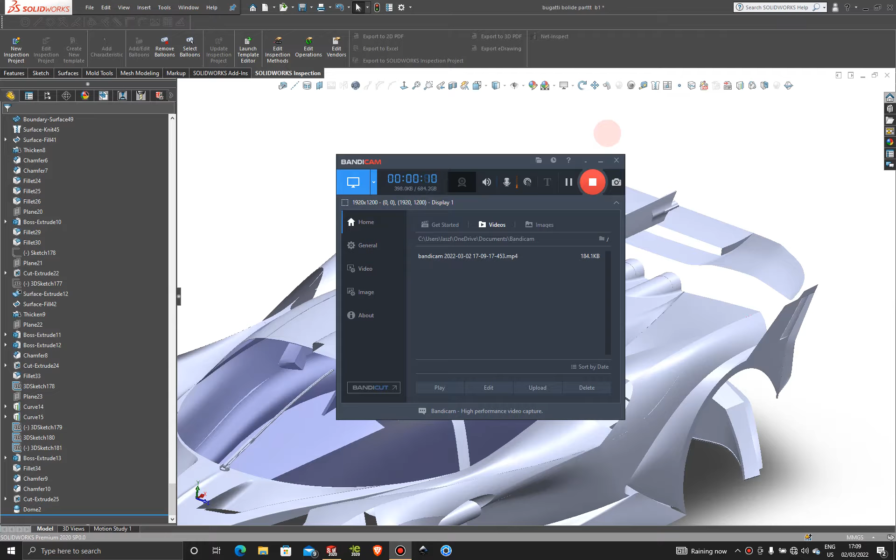So in this tutorial, we're going to fix up these surfaces here. We're going to attach this body to the surface, to the body of the car actually. We might not make it into a solid body for now, but we're just going to attach it. In the last tutorial we left off right over here, so let's pick it up from here and continue.

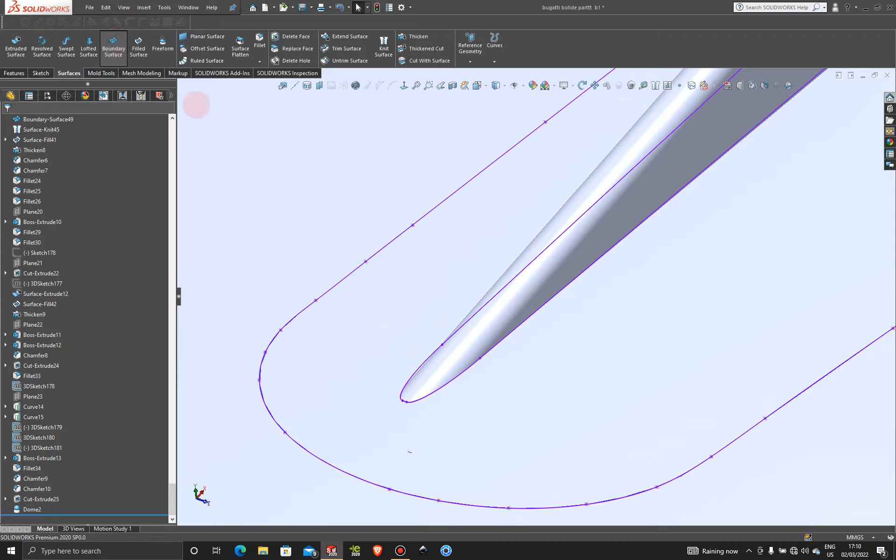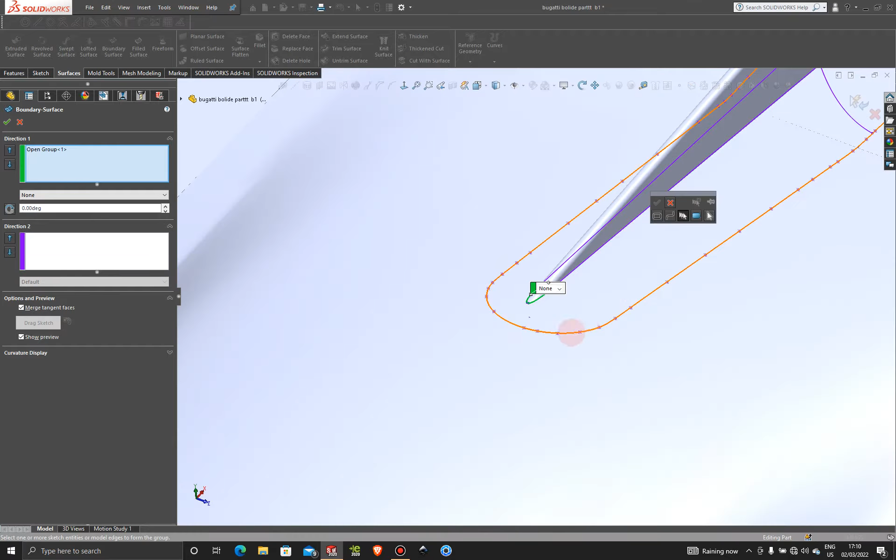So let's first create this first front piece here. Let's go to surfaces and boundary surface, and with the selection manager, let's select this sketch here, the small one in the front, and this here, and press OK. Then with the selection manager, we're gonna select this one here, press OK.

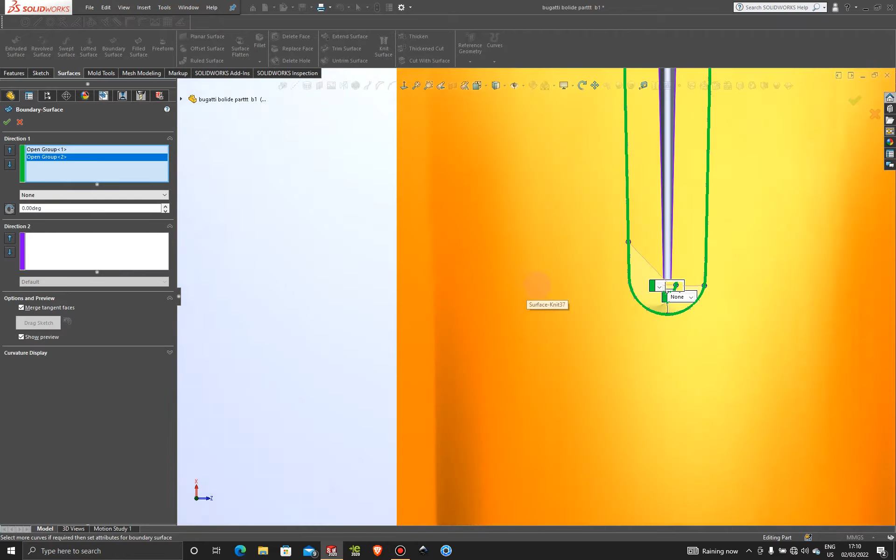Okay, and we're just gonna pull back these lines to about here, and this one as well. And we're gonna do something different here, so we can eliminate SolidWorks limitations.

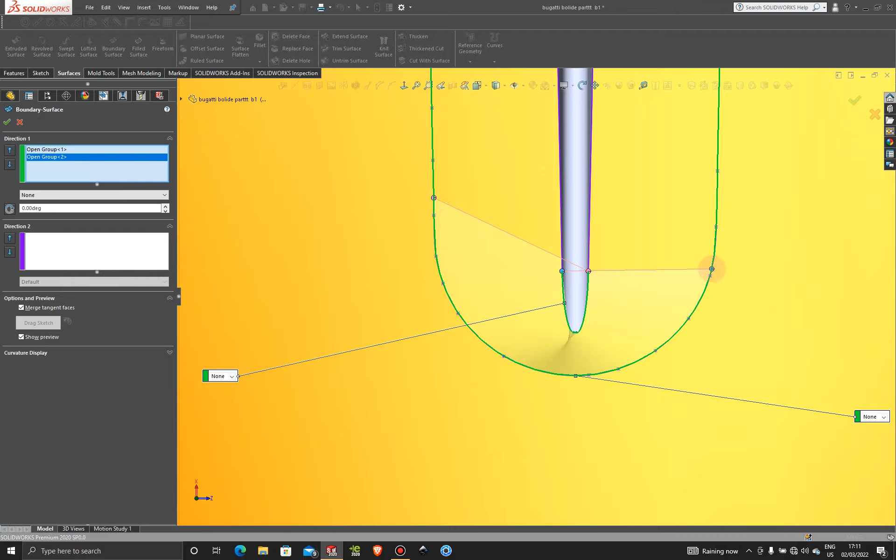So let's jump in here quickly and let's flip these connectors actually. So flip connectors, there you go. That's what we want, and we want to make these lines straight.

So the way we're gonna do that is we're gonna drag them around until it's a straight line. As long as there's a break in the line, it's not straight, obviously. So we're just gonna pull it until it's straight. As you can see, you've got 1, 2, and 3 breaks in it, so it's not straight yet. There's 1 break now, so let's make that straight this way.

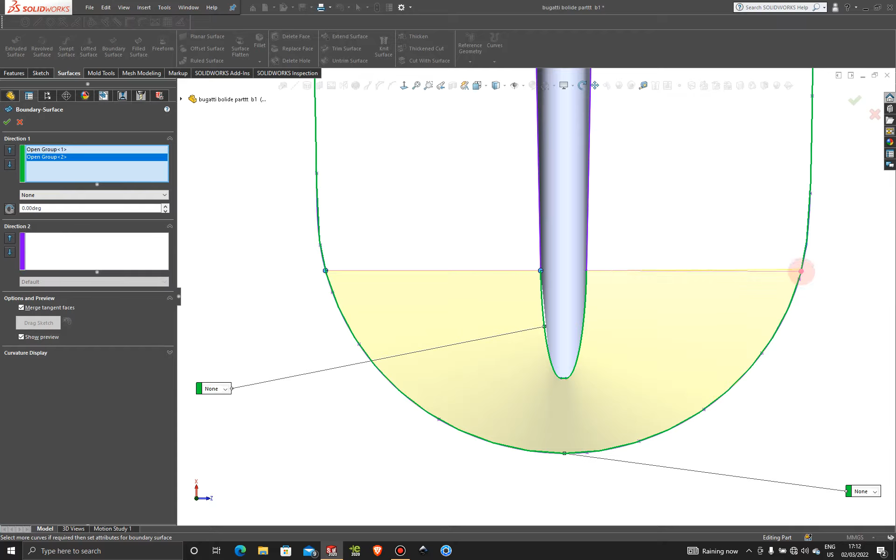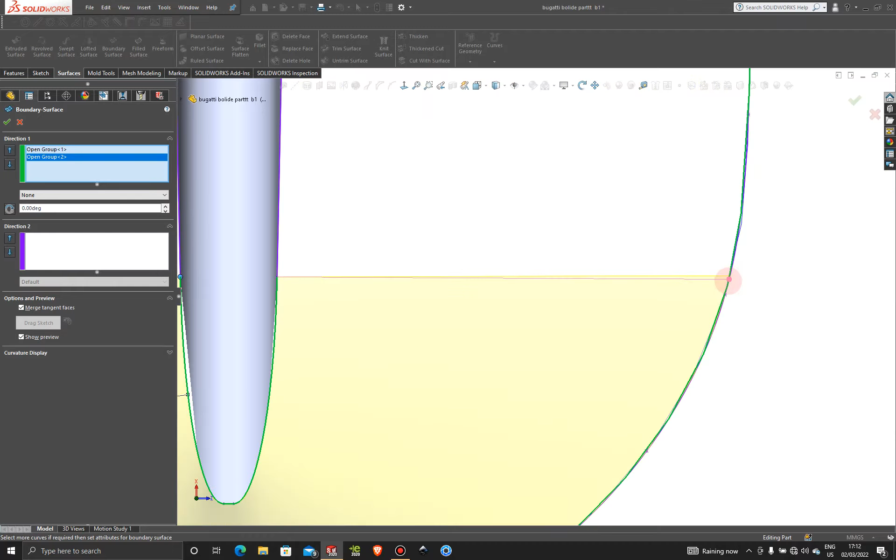If you zoom in a little bit more, that's the 1 break we want to get rid of. Just the 1 break. There's still 1 break in that line, and I don't think that will be an issue. All right, so we're gonna leave that as is and press OK.

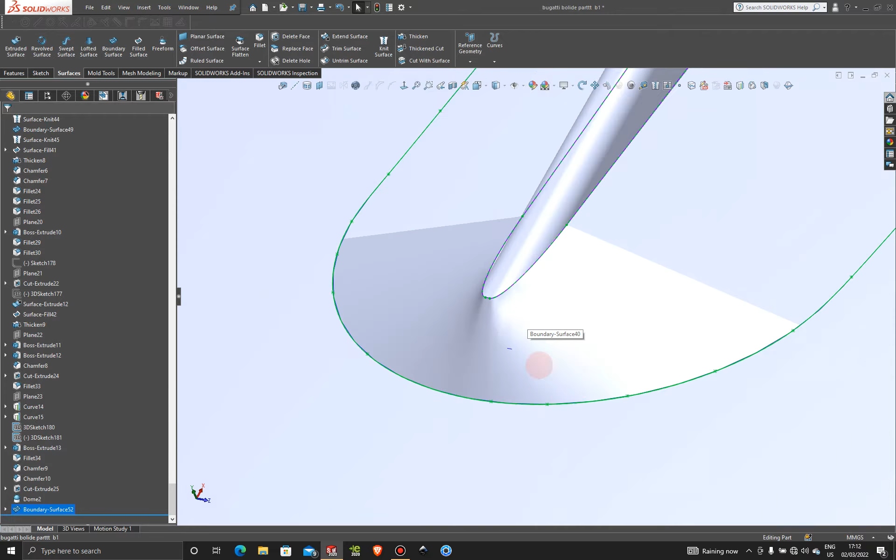We're just gonna have a look at the surface. Okay, so the surface looks good. However, I want to come back in here and edit this feature, and I want to see if I can add some tangency from here.

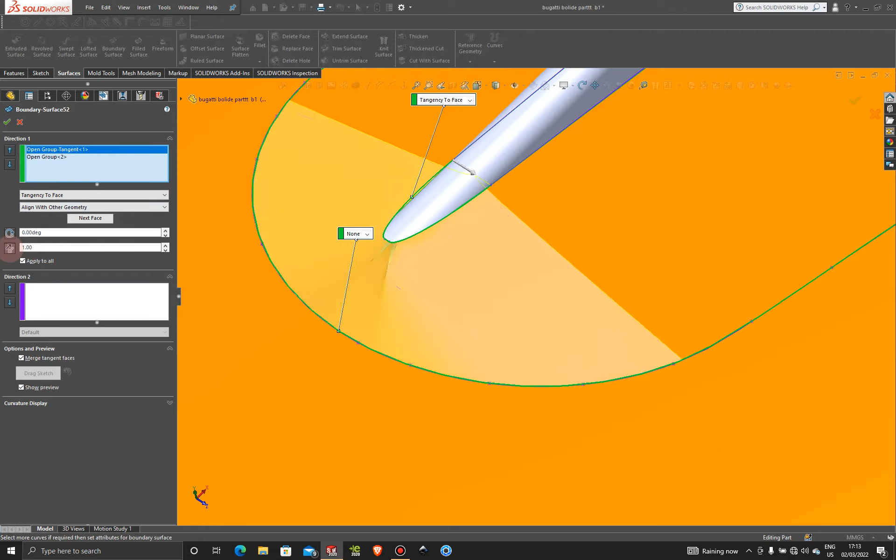Oh, I doubt it. No, direction to vector, tangency to face, and let's reverse that. Obviously, if you do that, it will create some ripple effect. So let's get rid of that, none, and let's try to add the tangency here, which we cannot. Or we could probably add a direction to vector, but let's just leave it like that.

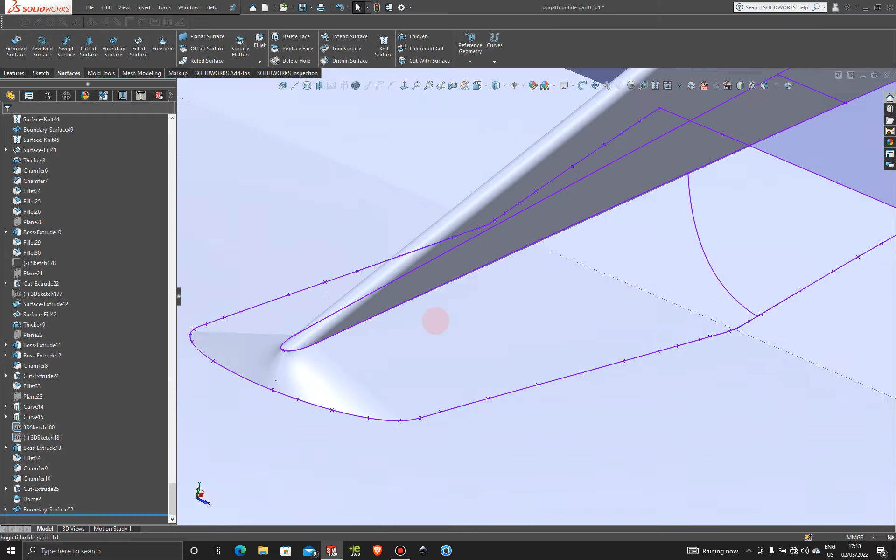Okay, and the next surface is going to be from here to here. So let's go to boundary surface and then selection manager. Let's select this line here, press OK, and then selection manager, of course, this line, and press OK.

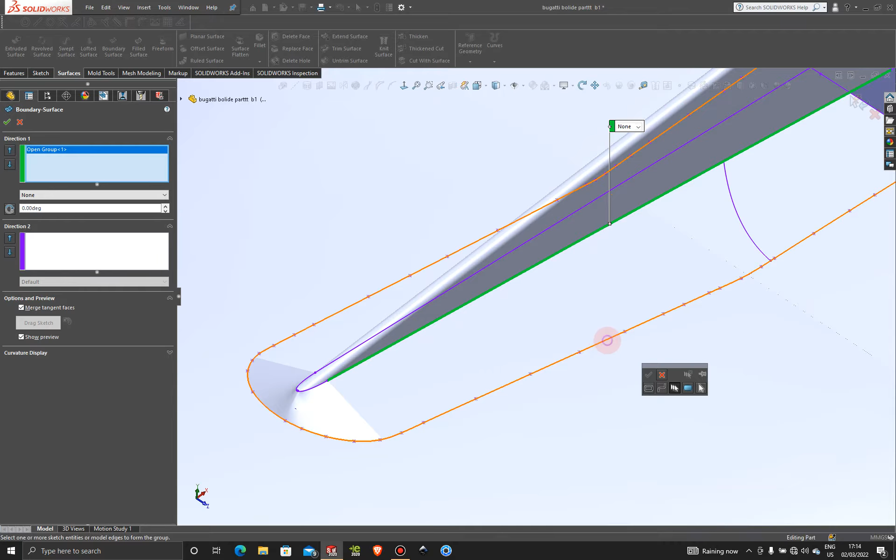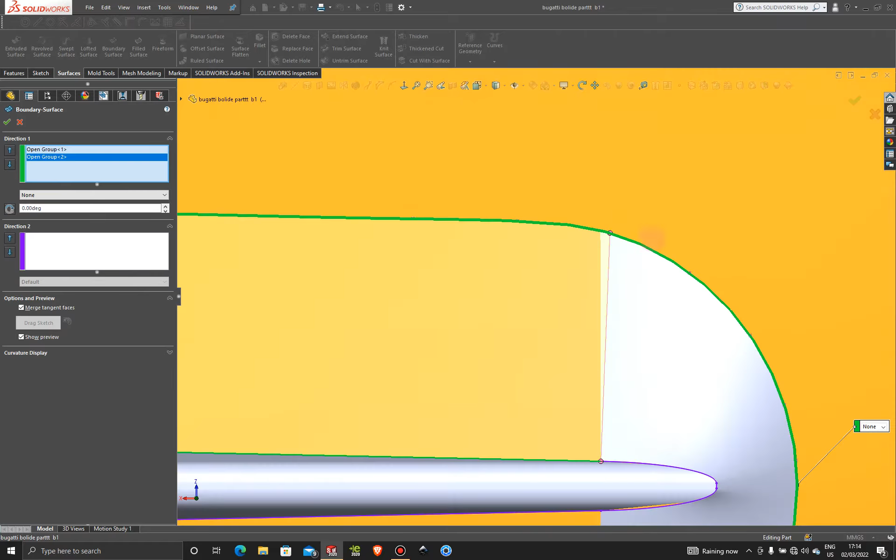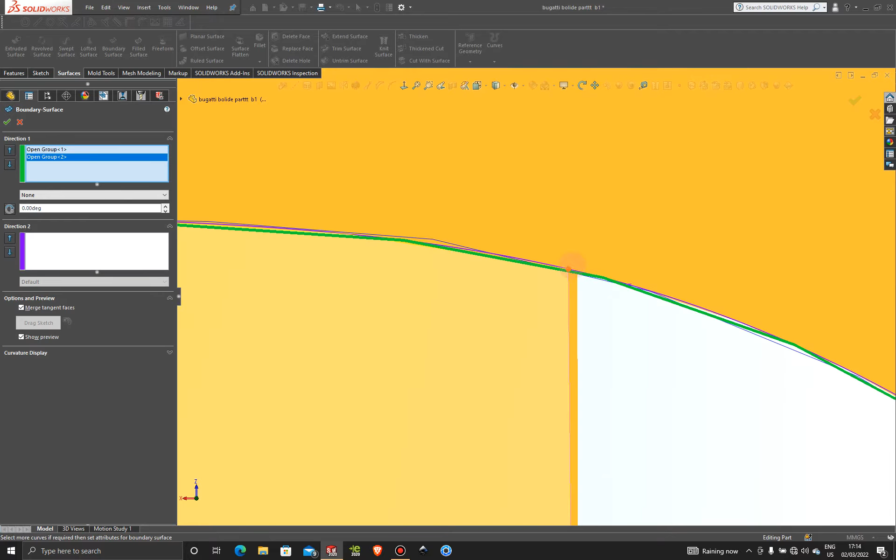And we're just gonna pull that point all the way around, back around, like that, and we want to touch that edge until we see the black dot. So let's get to the top of that surface here. Okay, so we're gonna go with something like that.

And for direction 2, let's select this line. And then let's select this edge. Hopefully we'll be able to select it. We actually are, which is good. And press OK.

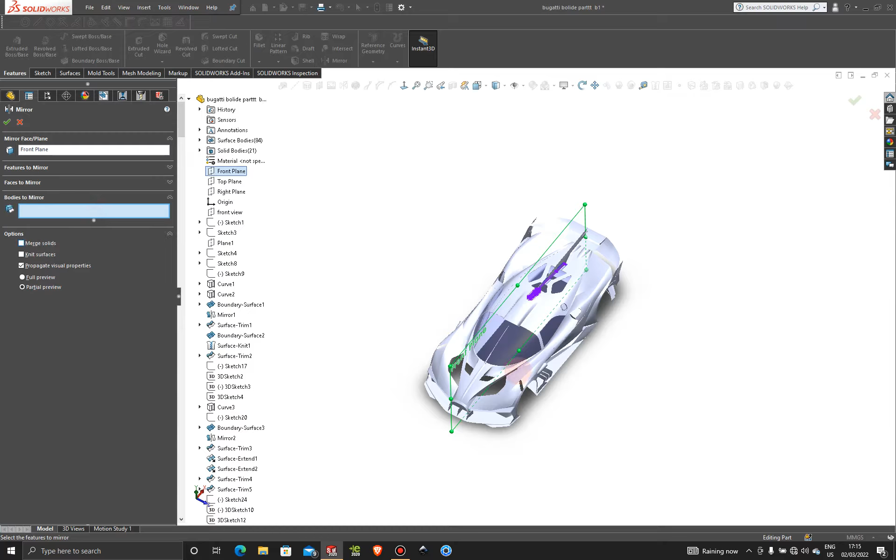Okay, so that created that beautiful surface right there. And then what we're gonna do is we're gonna mirror this surface over to the other side. So let's go to Features, Mirror, and then let's select the front plane as the mirror plane, and of course bodies to mirror as always. So let's zoom in here and let's select this surface here. Press OK.

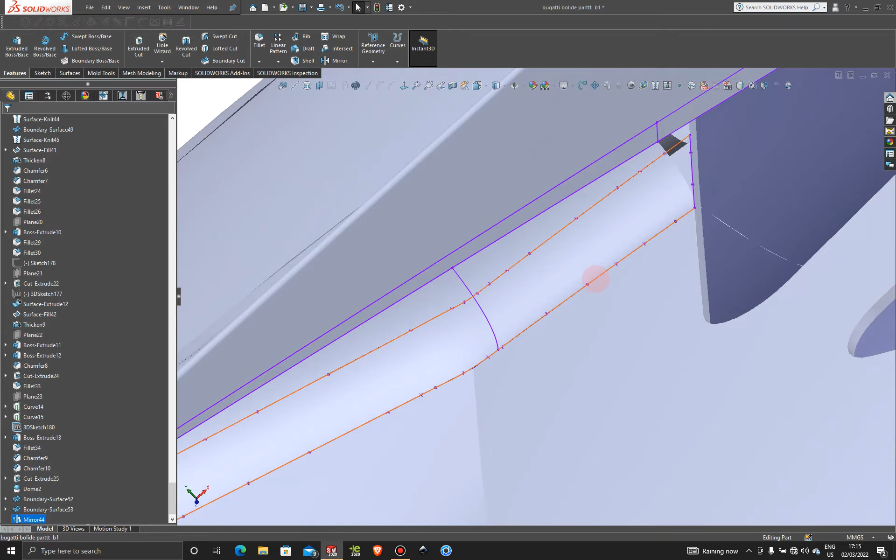All right. So this surface is not done, but I'm pretty happy with that. So now let's hide, let's not hide anything, we can hide the lower sketch here. So let's hide the lower sketch. Okay, and we're gonna leave that, and let's hide this directional curvature as well.

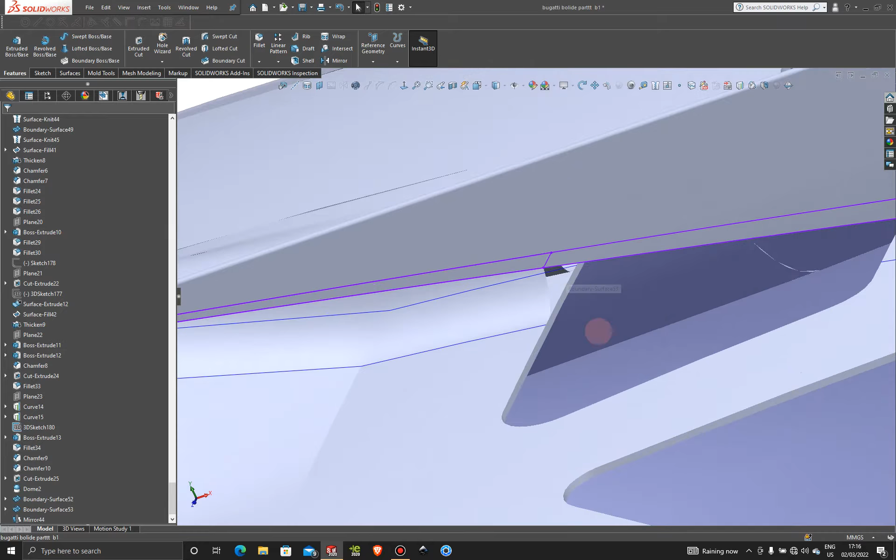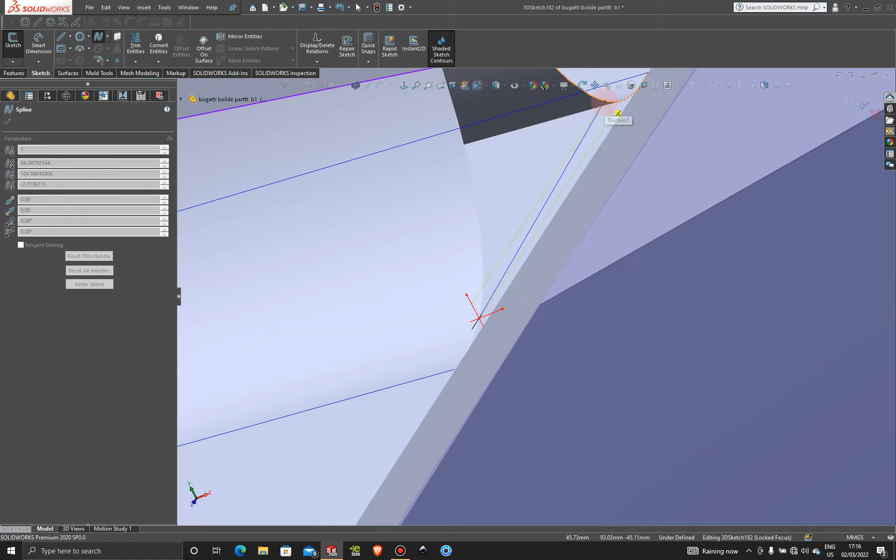And then we just want to close this surface up over here. So let's go to Sketch, 3D Sketch, and the first thing I want to do is grab a 3D sketch and just drop it onto this line, this edge here. And I want to grab that point and pull that point until it stops right on that end, and pull that until it stops on that end of that surface.

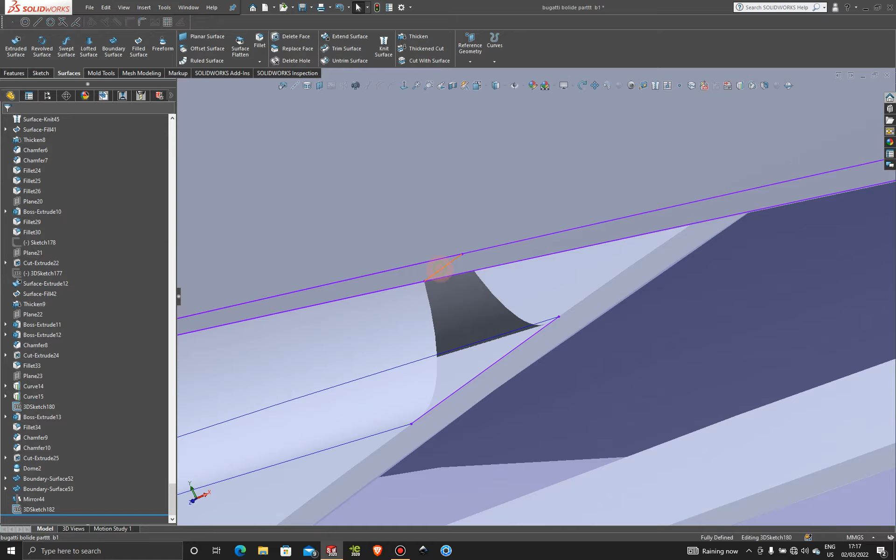Press OK. And now we're going to jump to surface here and let's create a filled surface from these sketches. So filled surface, automatically selected that one, and let's just select these edges here. So we're gonna have to hide this one here.

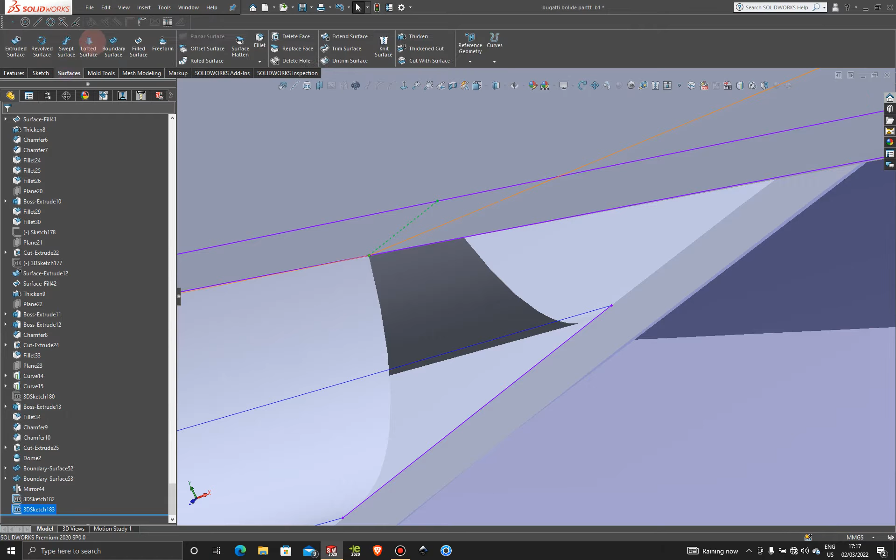Okay, and then we're gonna create a brand new 3D sketch, a 3D spline from this point to this point here. Okay, and then hopefully now it will give us the nice fill surface we're looking for. So let's go to surfaces, fill surface, and let's select these edges here. That's it, that's the surface we're looking for, that's a nice surface. So let's go to knit surface and knit these two together.

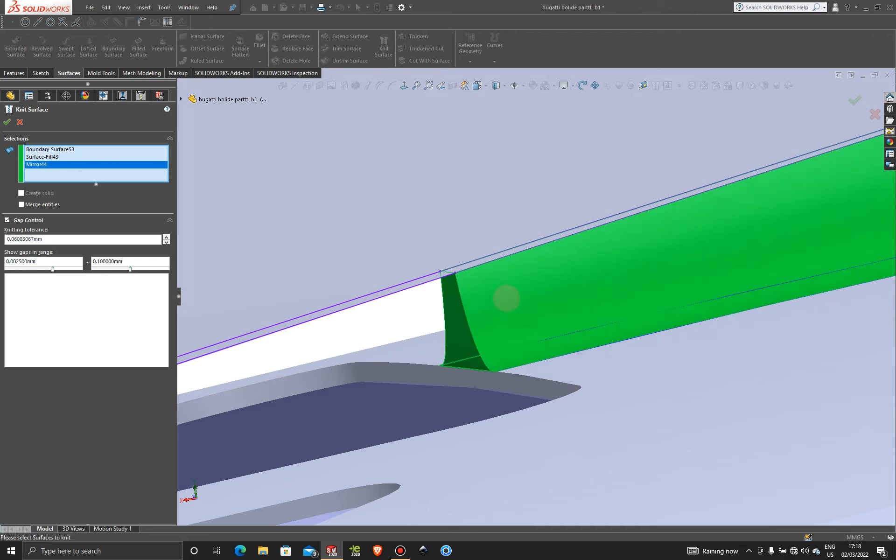All right, so if you want to make a solid, obviously we're gonna have to create another surface on the lower section, which we will probably do. But for now we just leave it like that. I think it's pretty good.

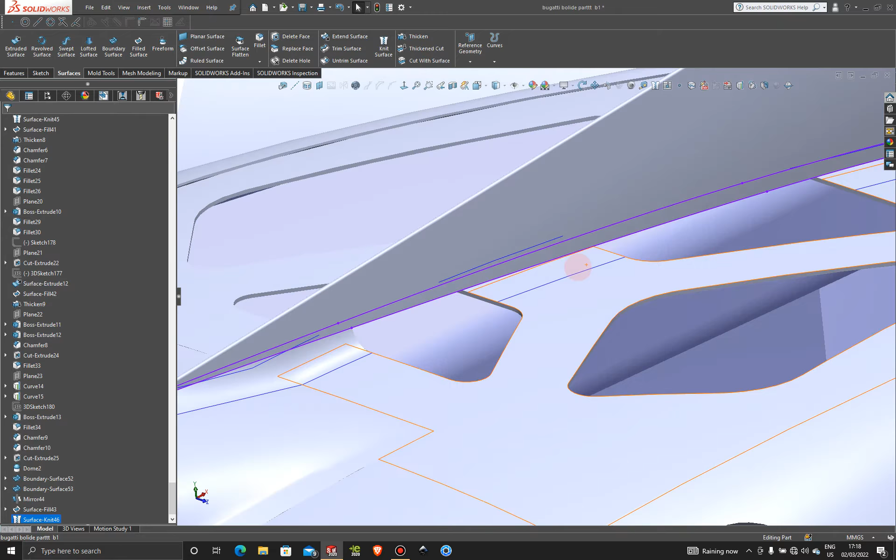So the next thing we want to do is create the next surface coming from here to here. For that, we're gonna have to create a direction vector. So we're gonna go grab a 3D sketch, grab a center line, and drop that center line right over here on that edge. Then exit this one and click somewhere in empty space.

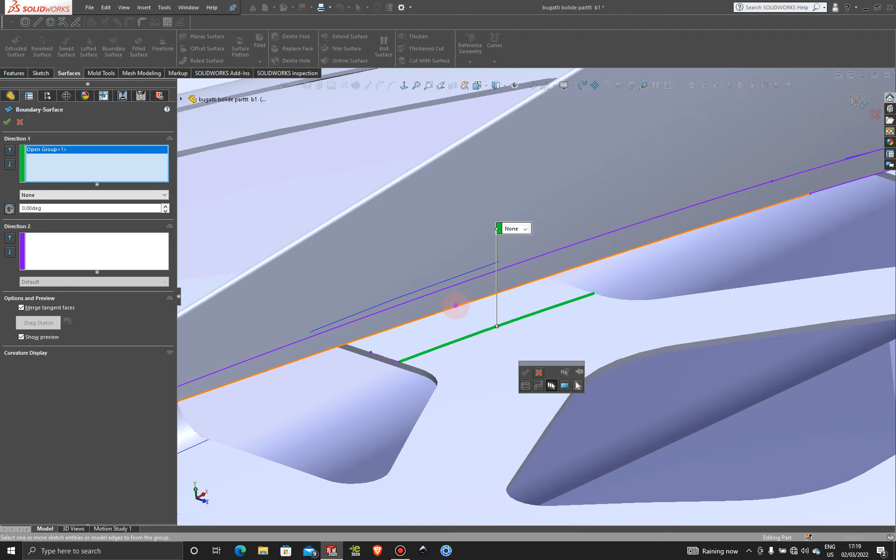Let's grab that surface, this boundary surface, and with the selection manager we're gonna select this line here. Press OK. And again, selection manager, this sketch here, and press OK.

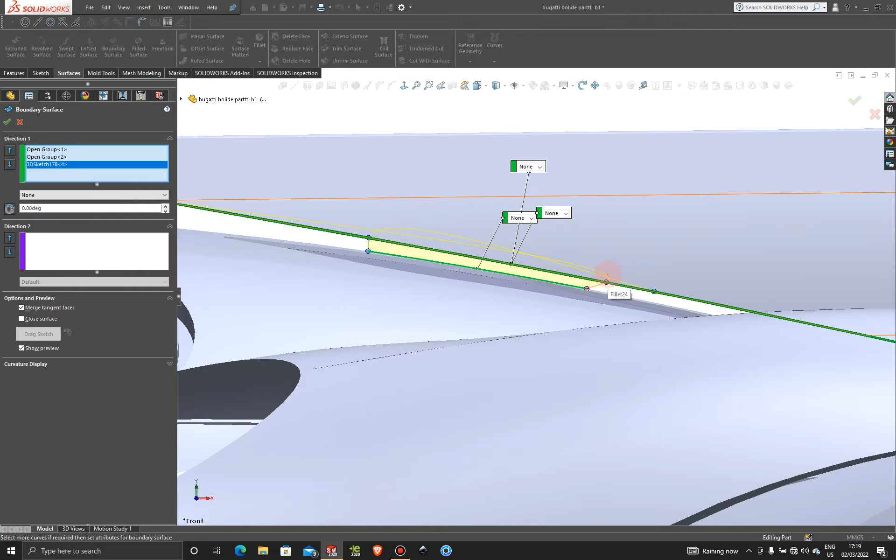We're just gonna jump to the side view here for a second, and set our parameters. I want to make that straight in that direction, and pull this up to about here like that. Well, let's do a control Z because we messed something up over here. Control Z, we'll do that. Clear selection, let's do that one more time.

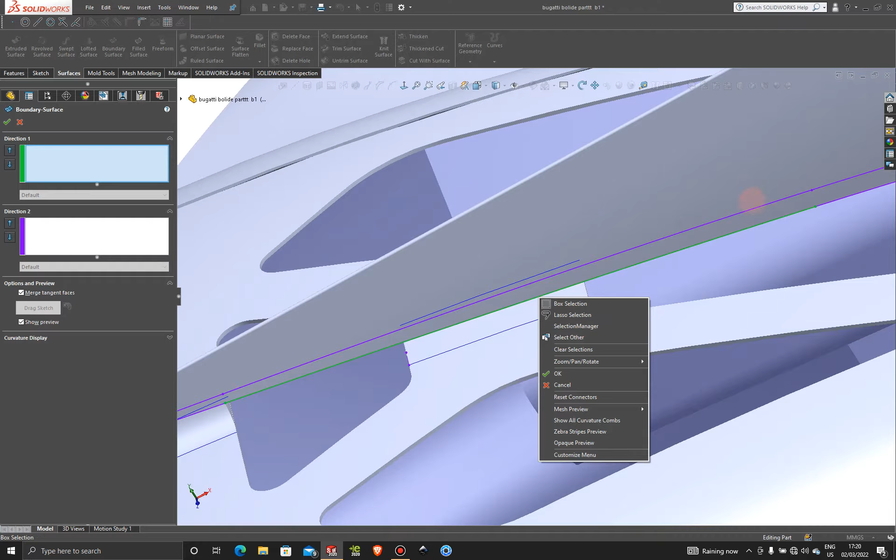To be honest with you, we can hide these lines here. So let's hide these lines. All we need is this directional vector over here.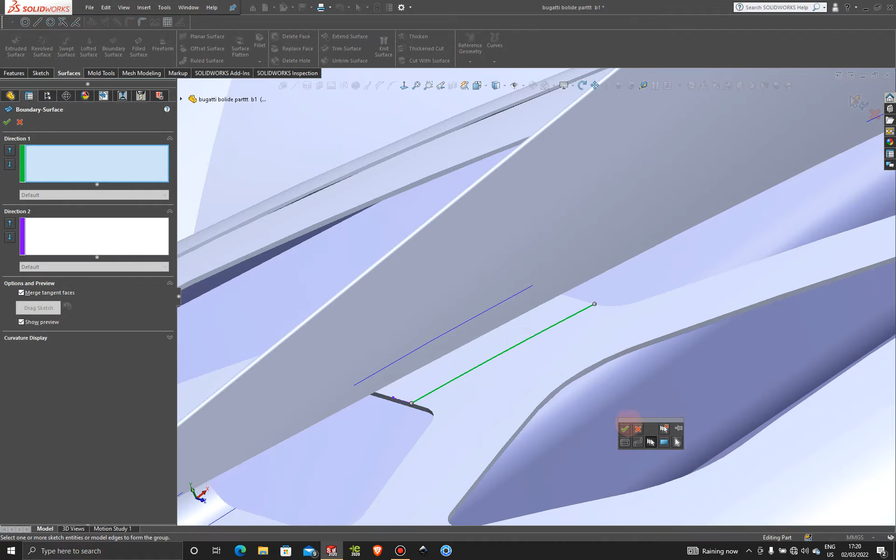So let's go and grab the boundary surface again, selection manager, and select this sketch here, not sketch but the projected curve. And again, selection manager, then select this edge here. Press OK.

And now let's grab that point and pull it in like that. We're just gonna look at it from the side. How does it look? Make it somewhat straight. Okay, that's good.

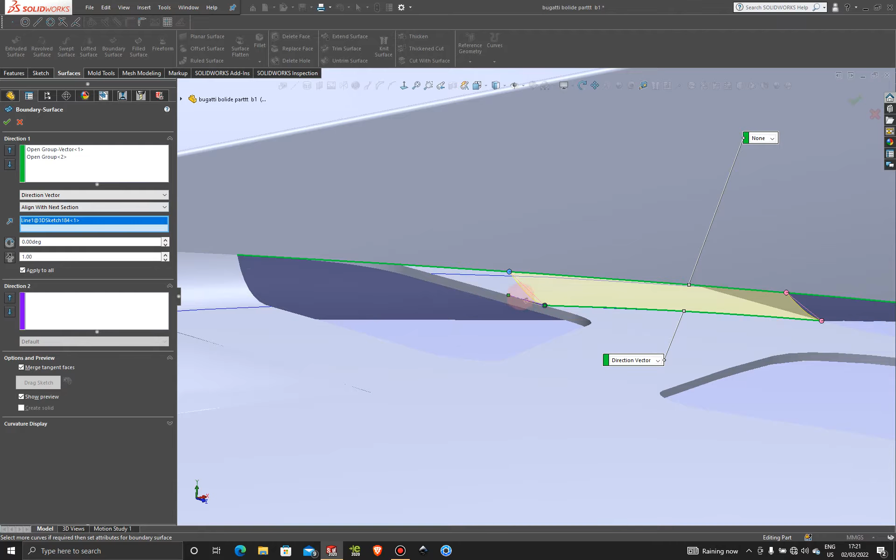And now we're gonna use our direction vector line here. So let's put this down here, and select direction vector, and our vector line is going to be this one here. And we're just gonna pull that a little bit in like that. Okay, I'm quite happy with that.

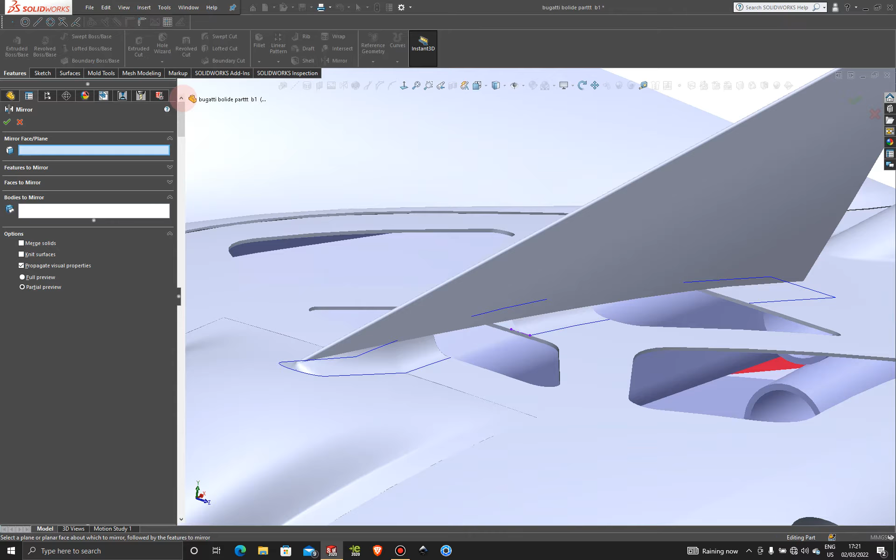And then again, we're just gonna go to features and then mirror, and we're going to mirror this first surface over to the other side. So let's select the front plane as a mirror plane, and then for the body is this small surface over here. Okay, so that created that surface there.

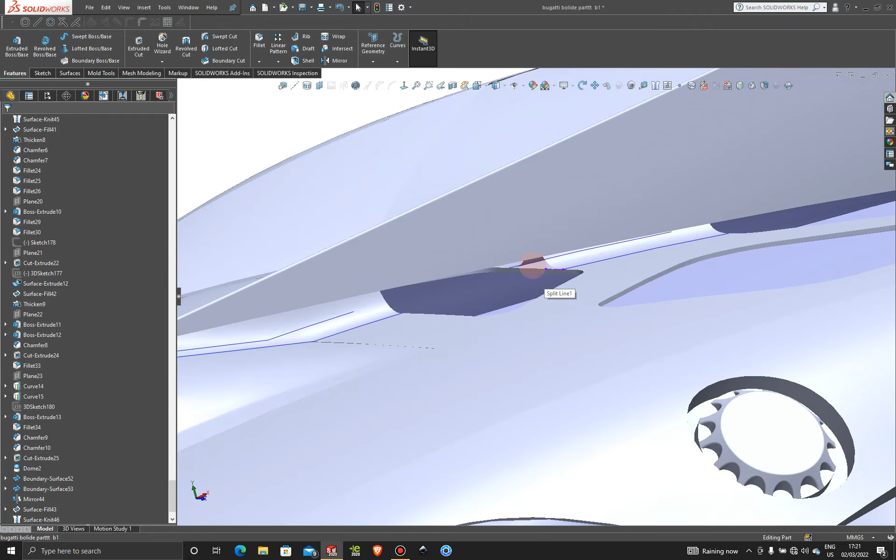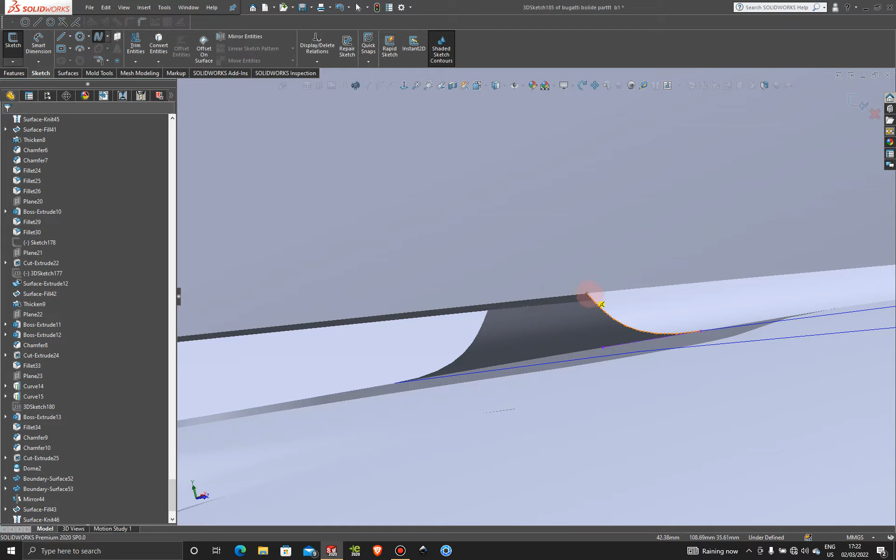And of course, all we have to do now is connect these two points here, so we can create a fill surface here. So let's go to sketch, then 3D sketch, and let's grab the spline, and we want to go from this very end point here to this point here.

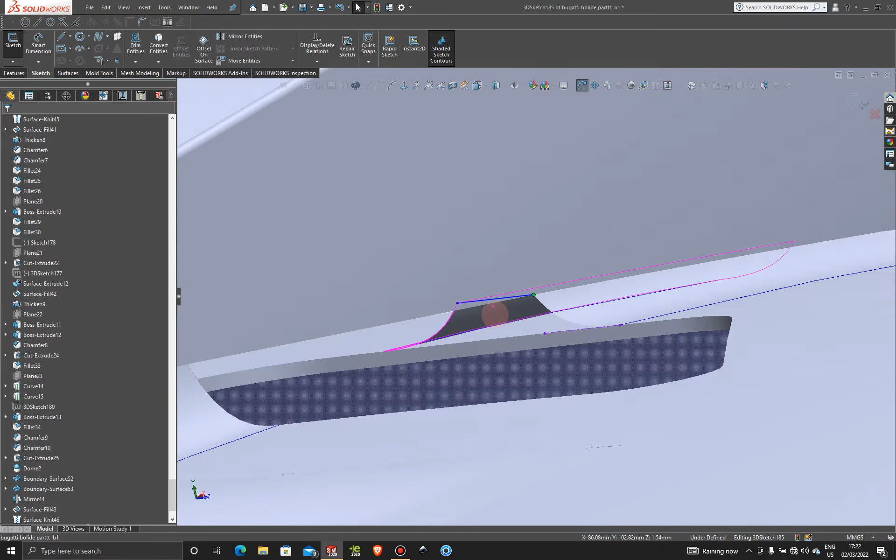Let's go control Z because we didn't snap to that very well. So let's grab that spline again. Let's just click on these edges here, and we're just gonna pull these points up until it stops. That's it. Exit this one.

And we're gonna do the same thing on the bottom. So 3D sketch. I'm gonna see you back once I've created these on the lower section and on the other side as well. So see you back when I've done that.

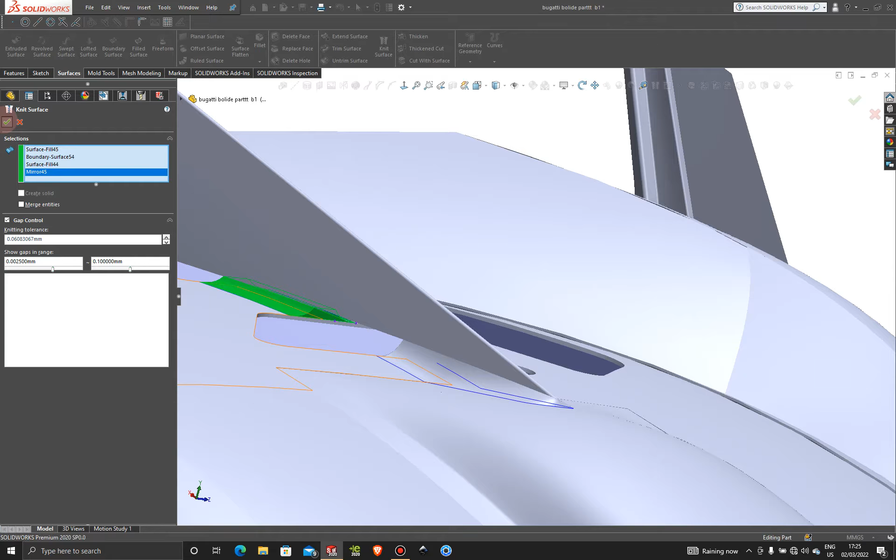Alright, so I've done the same thing on both sides here, and now we can knit them together. So let's select these faces here. And again, to turn it into a solid body, we need to create a surface underneath it and then create a solid. Okay, so that's done as well. I want to save the project here.

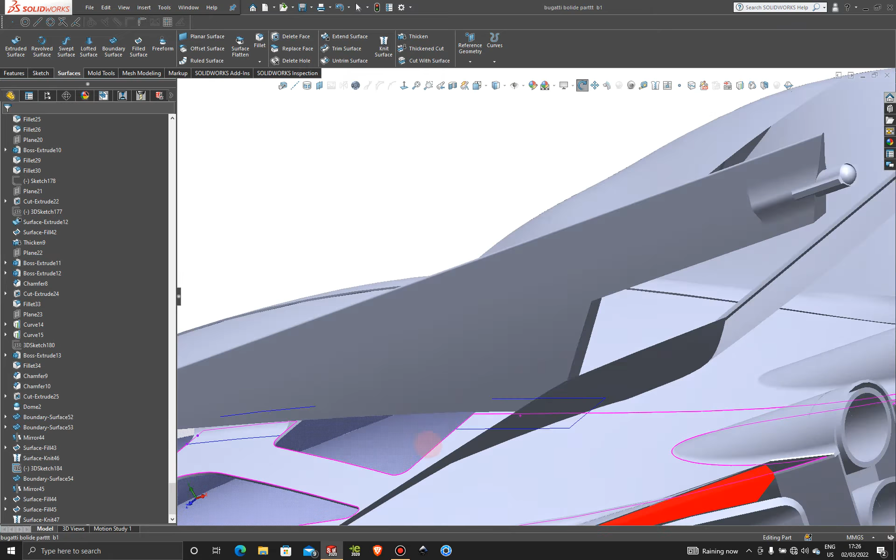Okay, and now let's jump to the back here. And on this rear section, we're gonna do the same thing. So first, I want to create a direction vector. So let's go to 3D sketch and grab that center line and drop it right on the edge of that sketch, and then exit this one here.

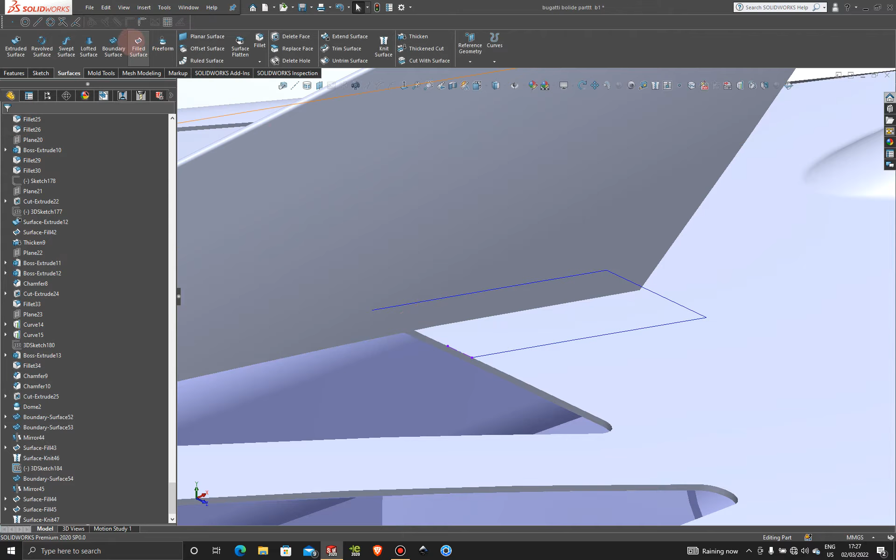Just clicking empty space. Let's go to surfaces and boundary surface, and with the selection manager let's select this edge here. Well, not that one, we want to select this one here. So boundary surface, selection manager, and let's select the actual edge. That's okay. And then selection manager and this sketch here.

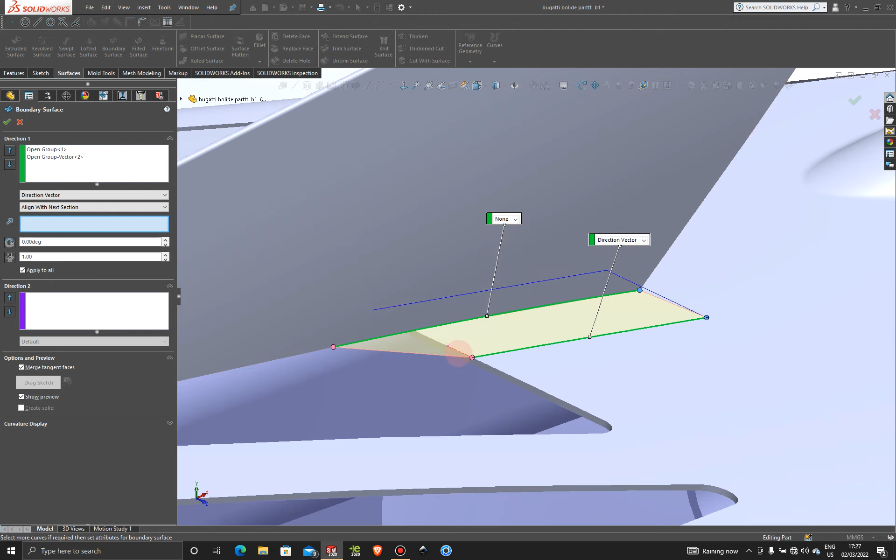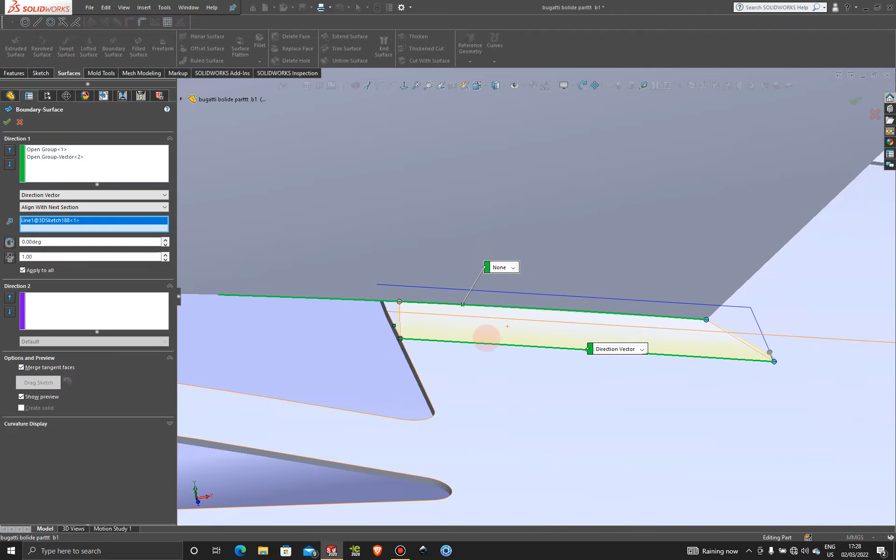And let's flip these connectors here. Okay, and for this side, we're gonna select direction vector, and our vector line is going to be this one here. Of course, we're gonna pull that back a little bit. So that's the direction vector point, and we're just gonna pull that a little bit in, something like that. That looks good.

Okay, and then we're just gonna mirror this over to the other side. So let's select the front plane. Front plane, and what to mirror is going to be the surface here.

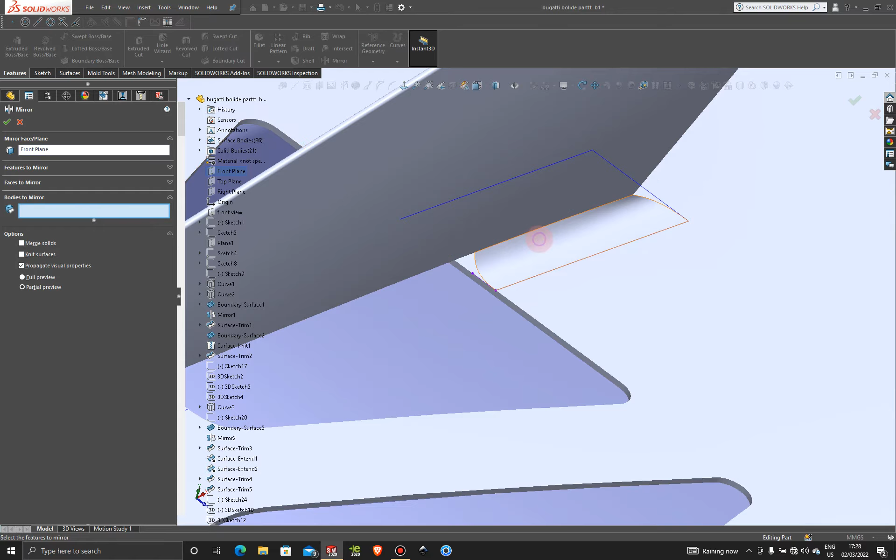All right, so once that's done, all we're gonna do now is connect with the same thing with the 3D sketch, these ends here and this edge here and on this side as well, and we're going to create a fill surface on both sides just like we did in the middle section. So I'm going to see you back when that's done.

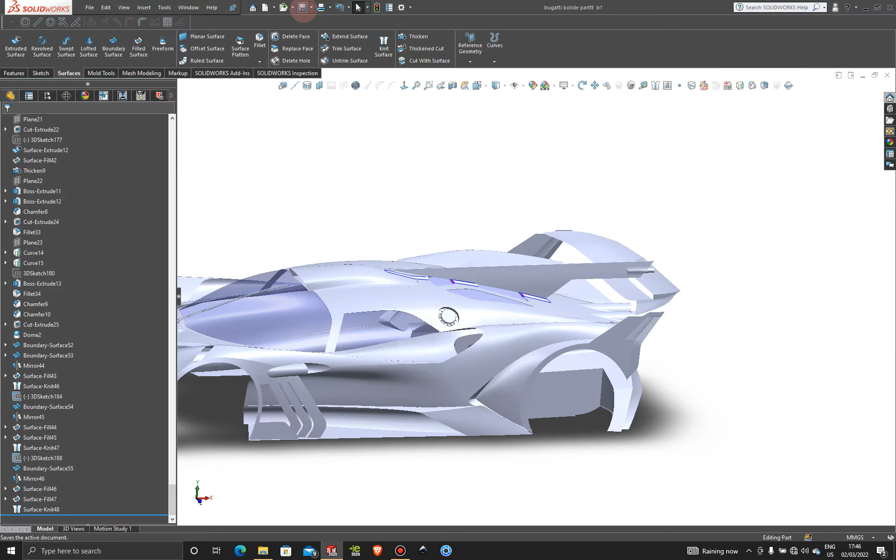All right, so guys, once you've done these surfaces here, I already done that, so you can knit them together, which I already did. So we're done with these surfaces here. Let's save the project here. Okay, that's good. And then let's hide these lines here now. So let's go to these lines.

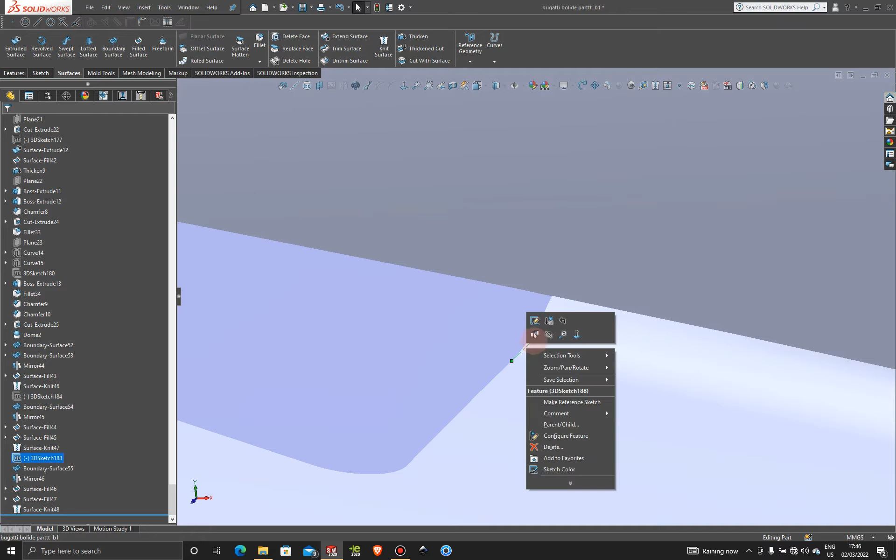Okay, so that looks very good. I want to save that one more time, so next time I open it, the lines will not show up.

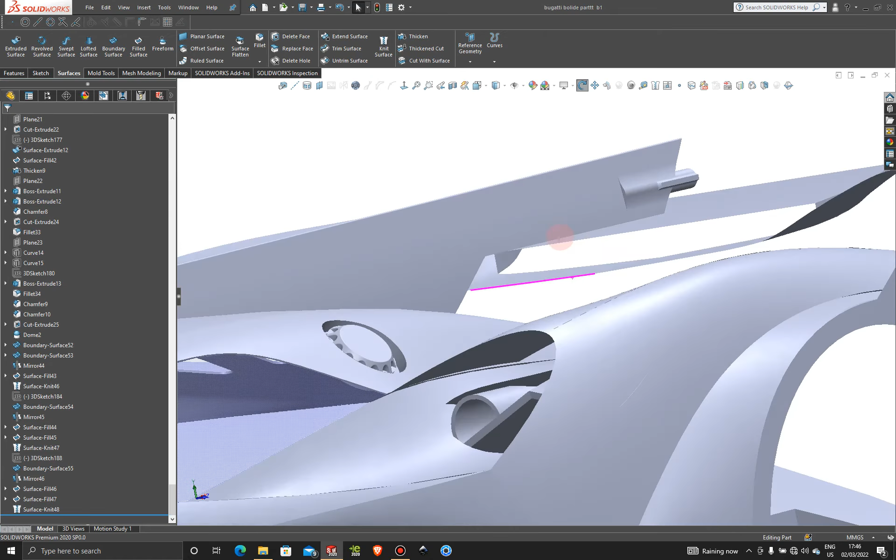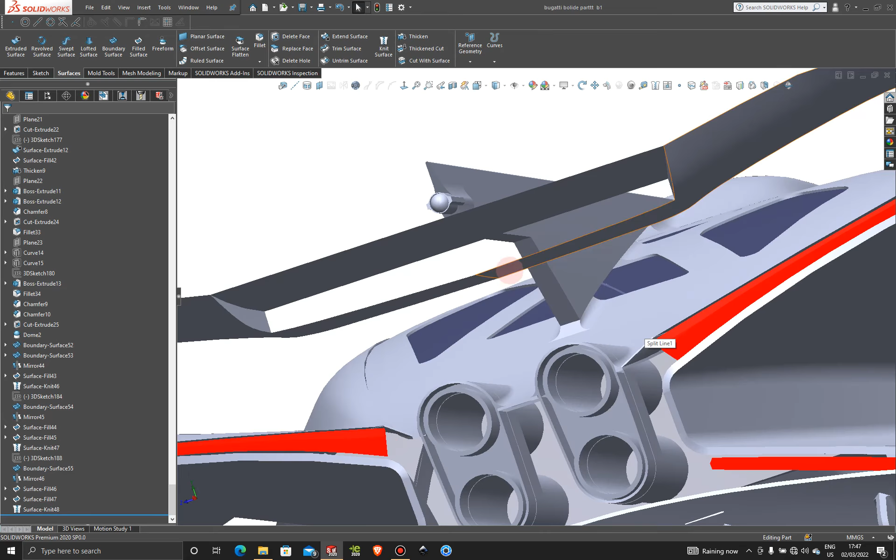All right, so now all we have to do is create some fixtures, a fixture from this body to the spoiler here, and then a fixture for this wing spoiler to this spoiler. So first, let's create the centerpiece here.

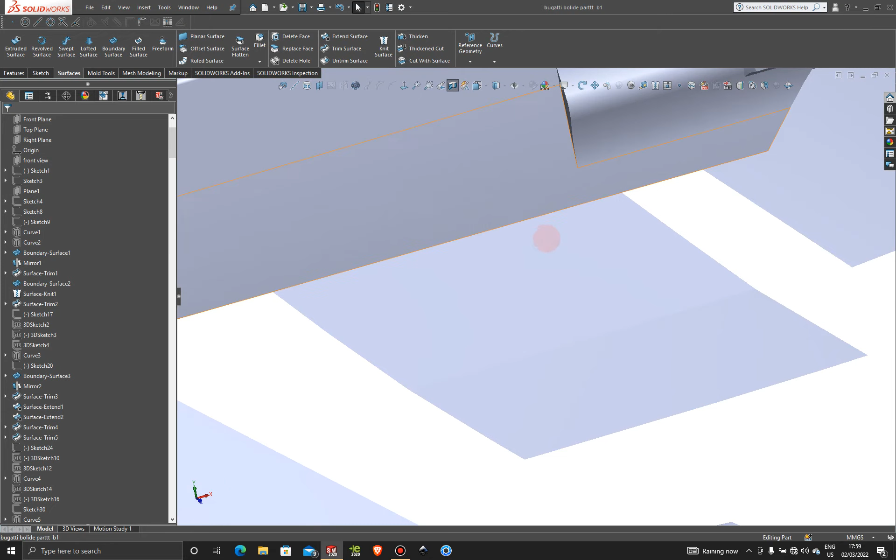Before I do that, I want to take a section view here. Once I add the section view, we can see a lot better what we need to work with. So I'm going to create a fixture connecting onto this surface here.

So to do that, what I'm planning to do is create a sketch on this surface first, or a plane probably would be better. But first, let's create a sketch here.

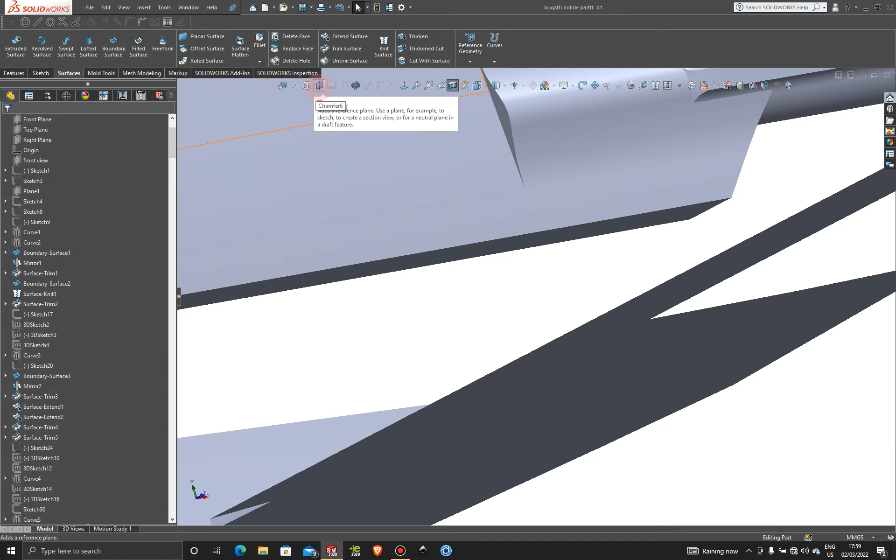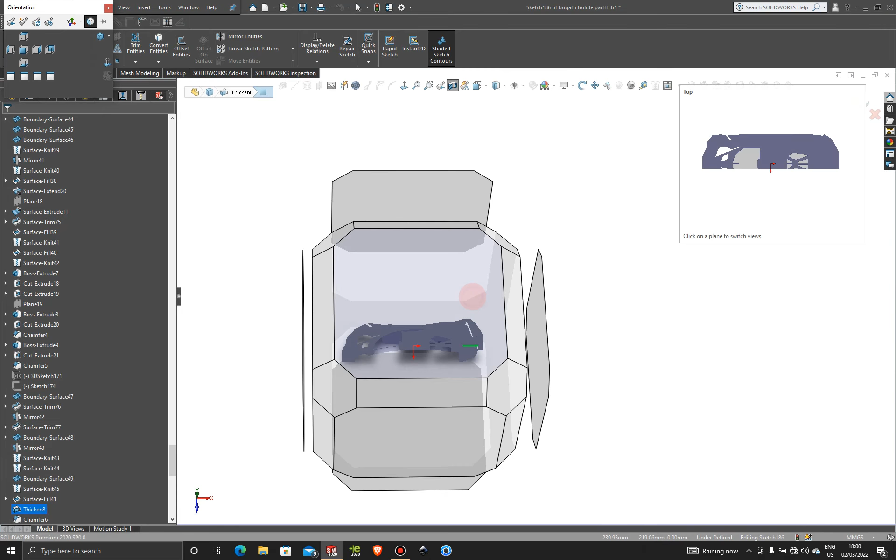And then let's get into view from the top view, of course. We want to add it somewhere here underneath that, so we're going to remember that. Actually I want to get it somewhere here, just after that.

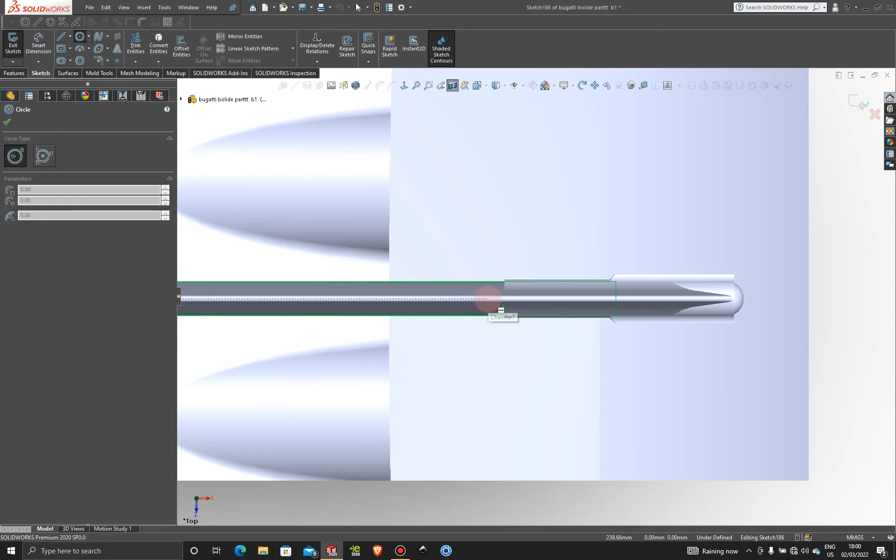Okay, so let's grab a circle and drop it somewhere here. Instead of a circle, let's try and grab a center rectangle right in the center, somewhere here.

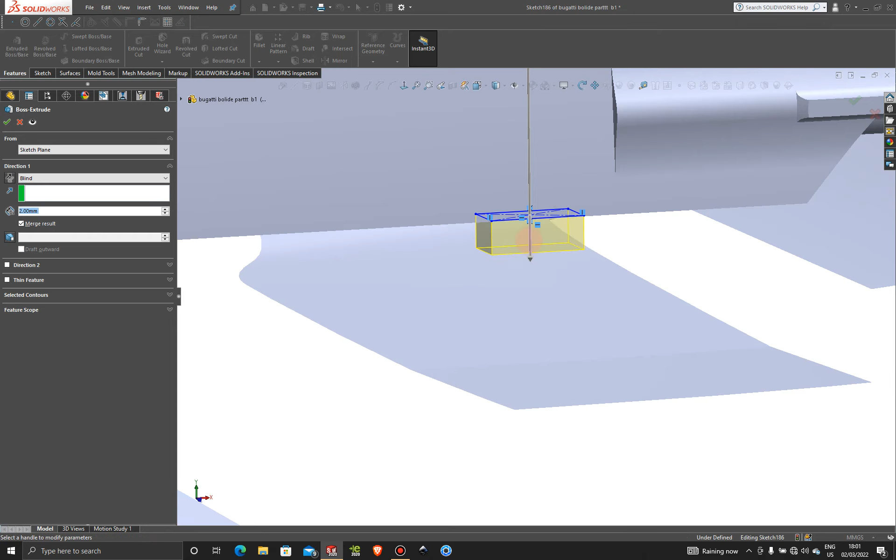And then let's go to features and extrude the sketch to there. Maybe we can make this a little bit smaller. Something like that.

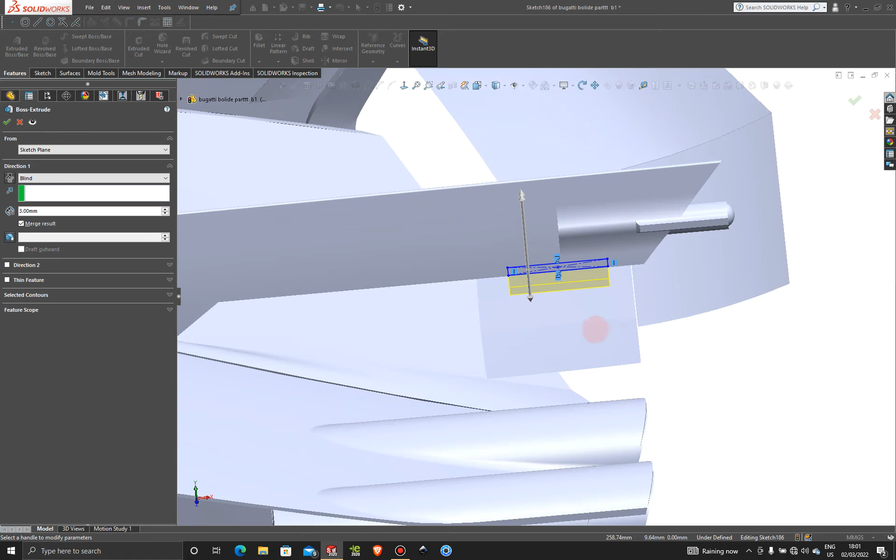Or we can make this sketch a little bit longer, something like that, all the way, just to make it a little bit easy for ourselves. And we're going to extrude up to the surface here.

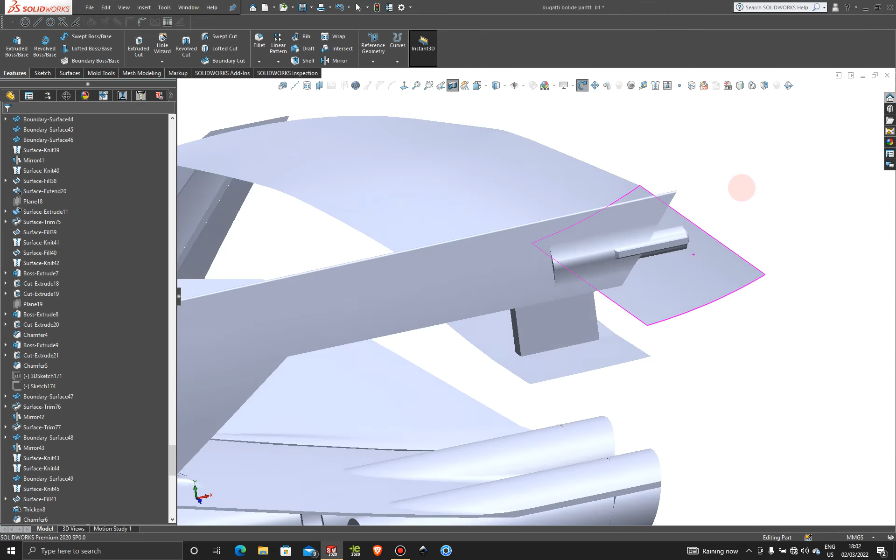Okay, and once we've done that, let's make a sketch on this face here, and let's get into view from this side. We're going to make a great sketch here.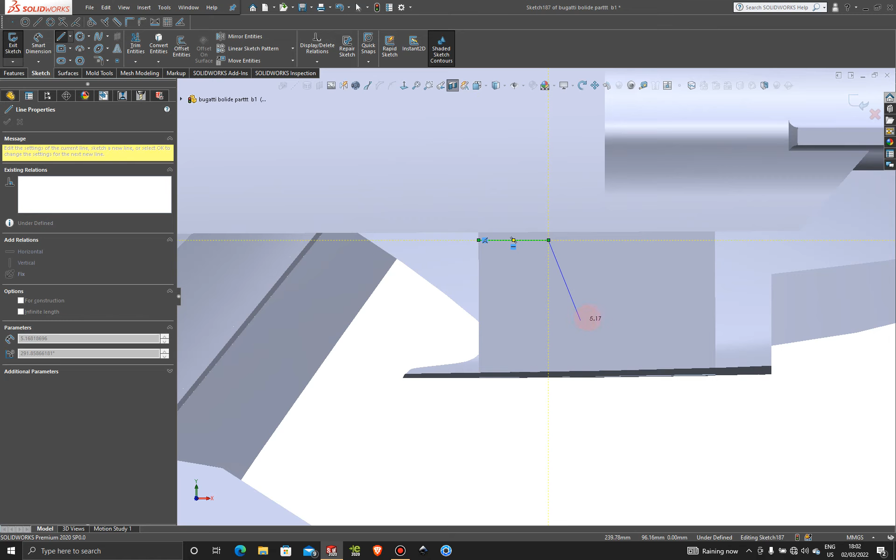So let's grab a line here and go from here to here, and all the way down like that, and something all the way down like here and straight out to about here, and just connect this point together. Let's go to features and cut extrude, and we're going to cut all the way through on that.

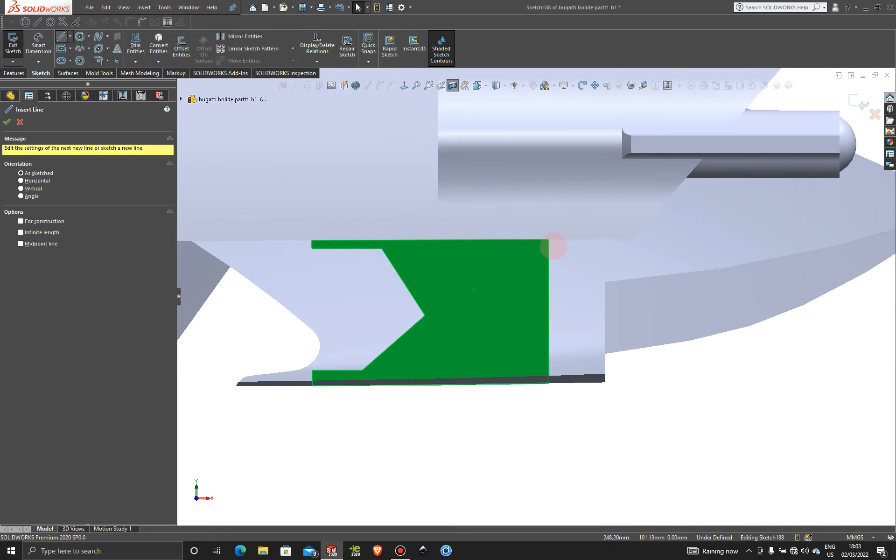Okay, and then again let's make another sketch on this face, normal to profile, and let's grab that other line, and we want to follow this edge here, so let's grab that line from here.

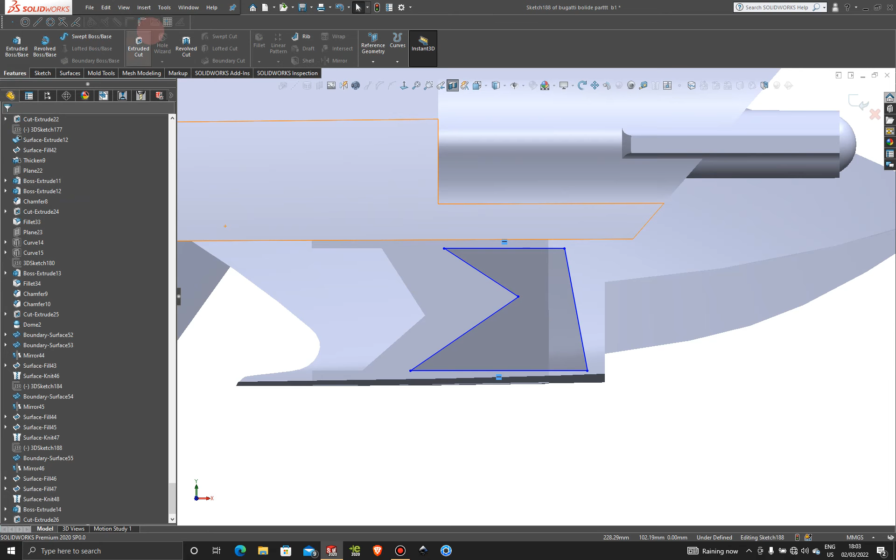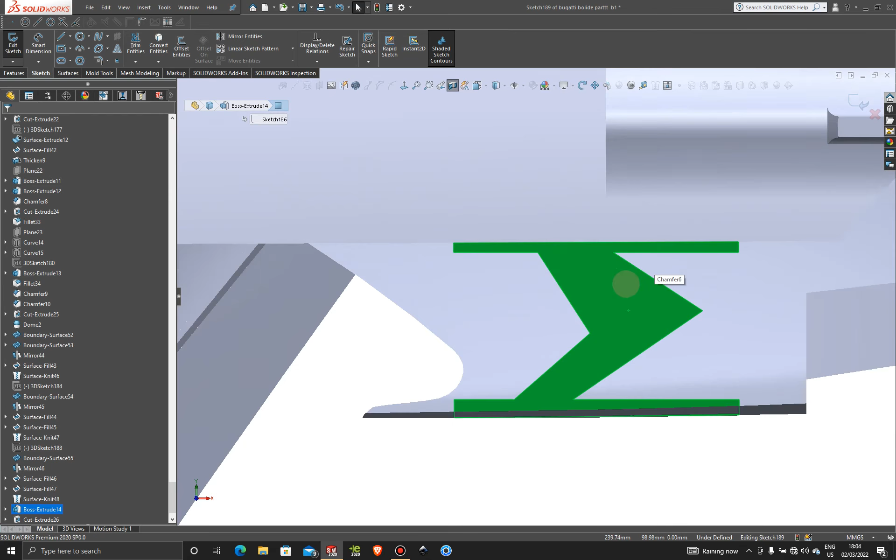Okay, so that's that. And again, I want to create one more sketch on this face. I want to take out some more material from that. So let's grab another line here, and let's grab that edge here.

And go to somewhere about here, down to here. And we're going to cut out like that.

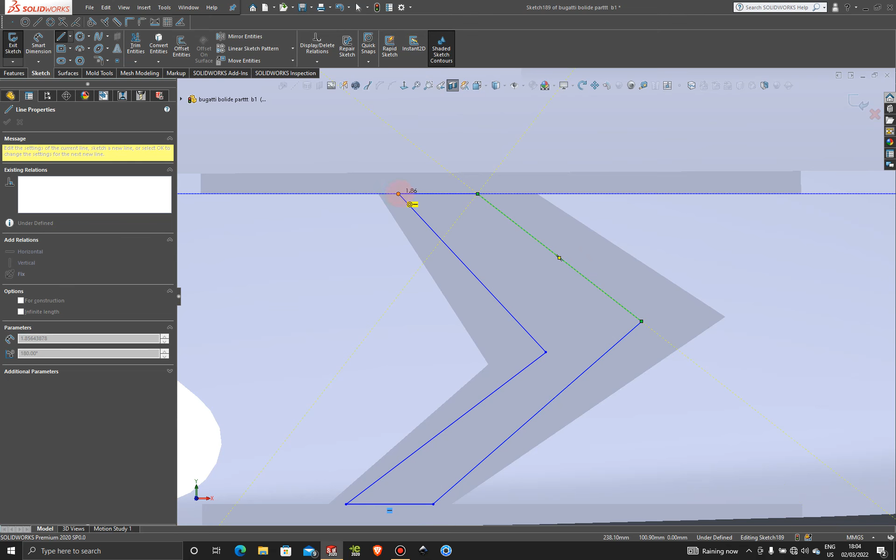Go all the way up to here and connect that point. And let's go to features and cut extrude all the way through. Press OK.

Alright, so we're looking good on that. So all we're going to do now is add some fillets in these corners. So let's go to fillet, add one right here. Let's try one.

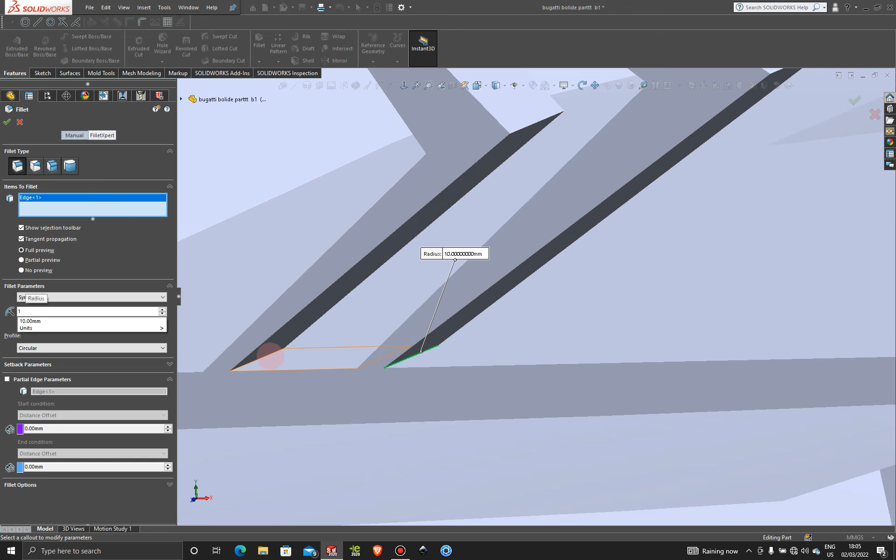So let's try one here. Press OK. Alright, and then maybe I'm not happy with that, so let's Control Z.

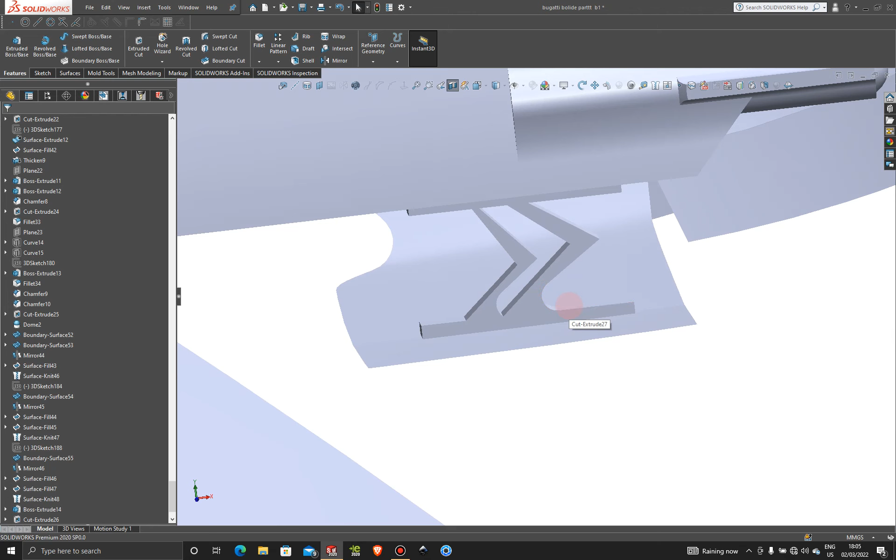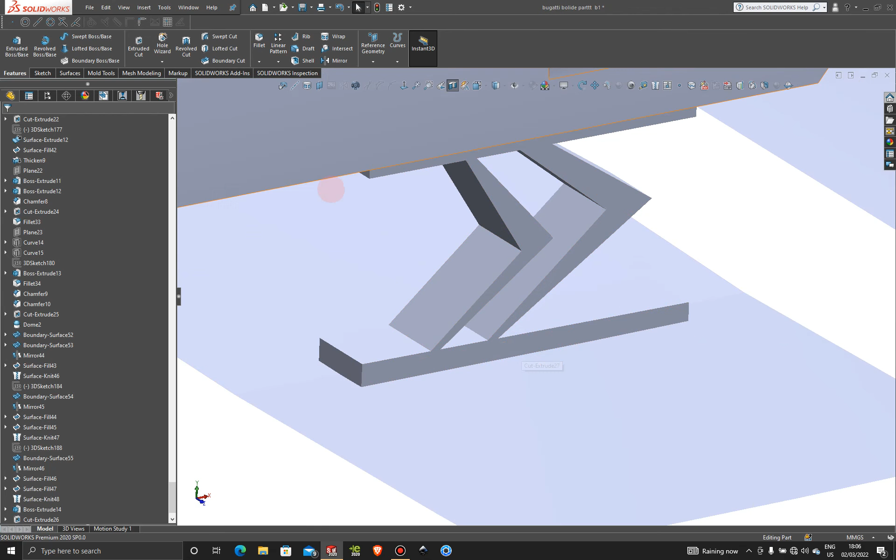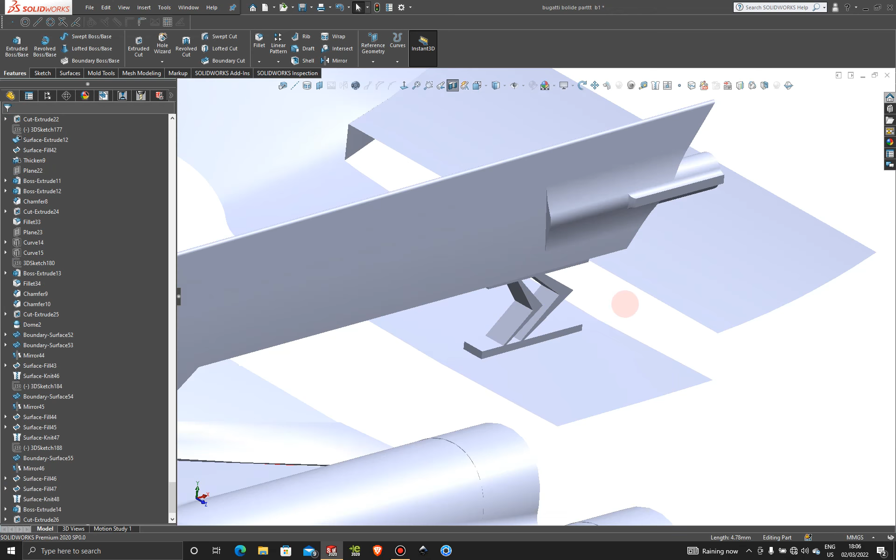So right, what I want to do here is let's try and add our fillets on these sides here. That's obviously not going to work like that. So instead, what we're going to do is we're going to leave it as is.

And that completes that fixture right there. Of course it can have some screws here, and later we can work on it a little bit more. So that fixes that onto that body there with probably some screws, of course.

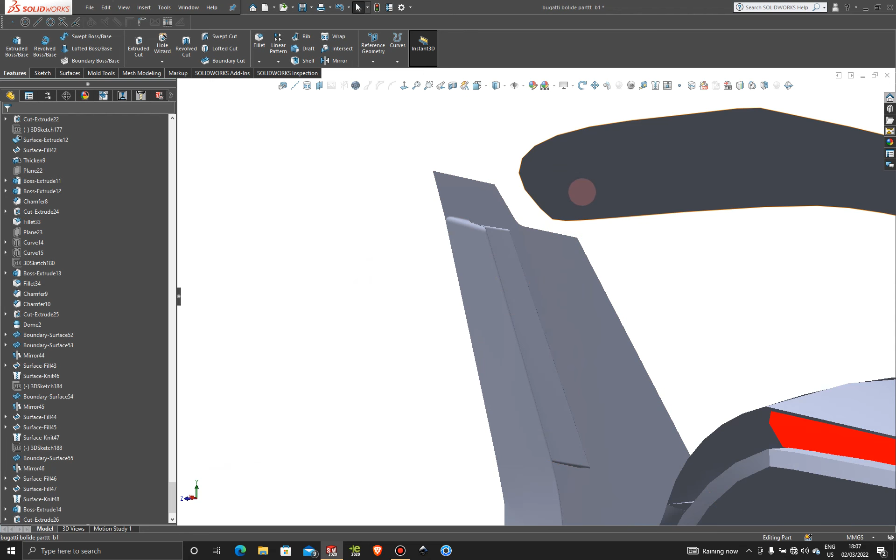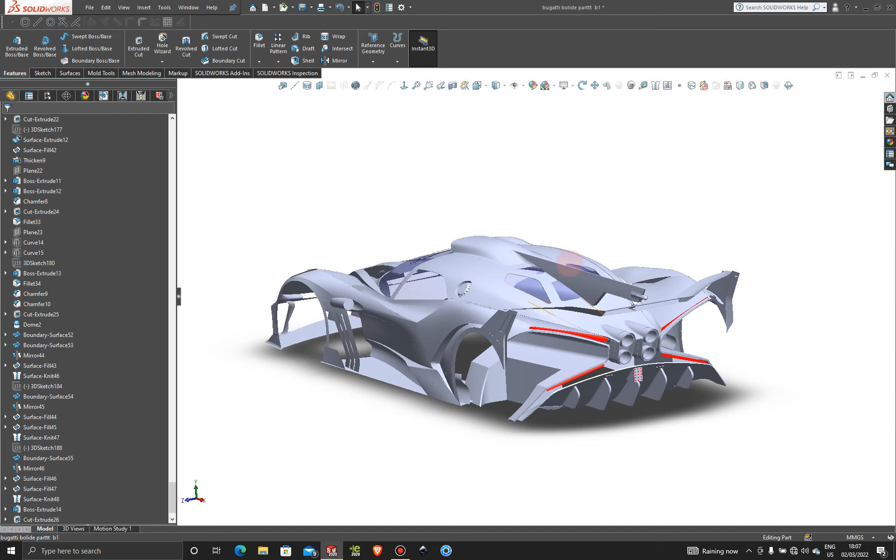Alright, so the only thing left to do is create our fixtures between these two surfaces here. Okay, so to do that, first we're going to have to create a plane off of here. So let's bring up, actually we're going to do that in the next tutorial.